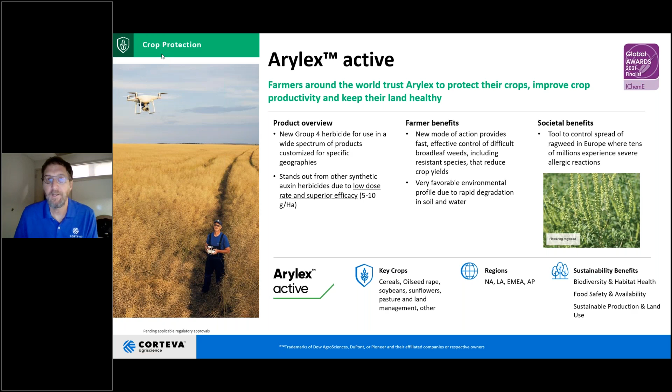An important societal benefit that Arylex is poised to help provide is in the control of invasive ragweed in Europe in particular. Ragweed is a weed that is indigenous to North America but has spread to Europe, and is also projected to expand its footprint across Europe due to climate change. Tens of millions of people in Europe currently experience severe allergic reactions to ragweed, and the ability to control this weed, which causes a public health issue, is an important societal benefit of Arylex.

The manufacturing process to develop Arylex involves a key step which utilizes a precious metal palladium catalyst to form the bond between the two rings of Arylex. In developing the manufacturing process, we had to perform this chemistry using this expensive palladium catalyst, and efficient use of palladium was key to the commercial value of this product and its ability to be used by farmers.

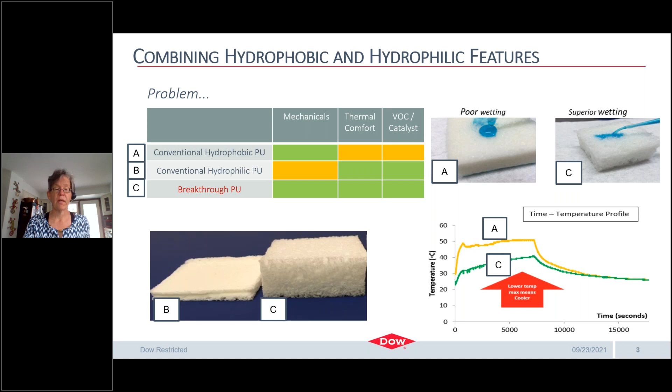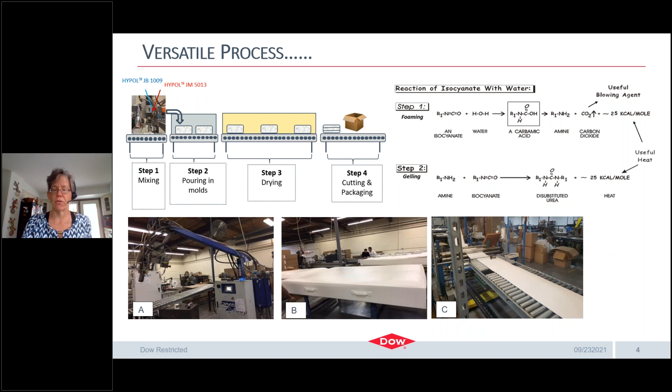I have a short video I'd like to show. We'll see if it works. And if it doesn't, just let me know.

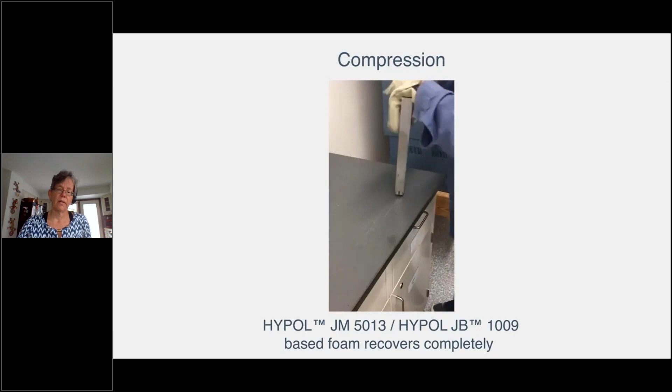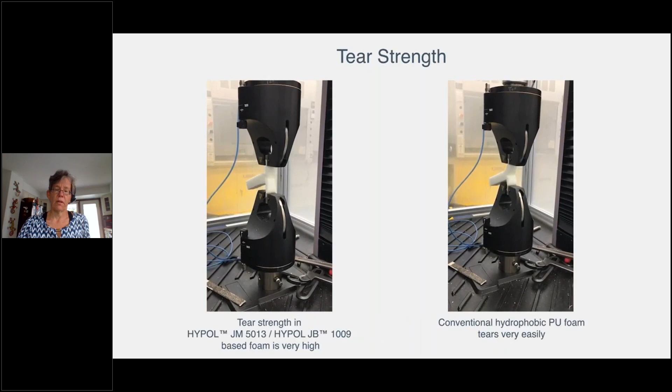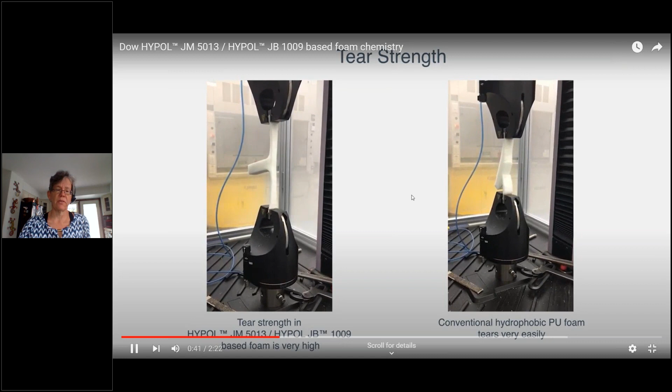Here is a comparison of tear strength. This is a conventional material here - you're going to see it rip pretty quickly - whereas our new material continues to have elasticity there.

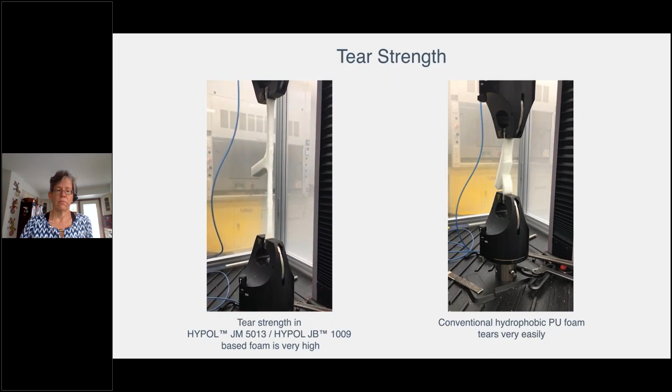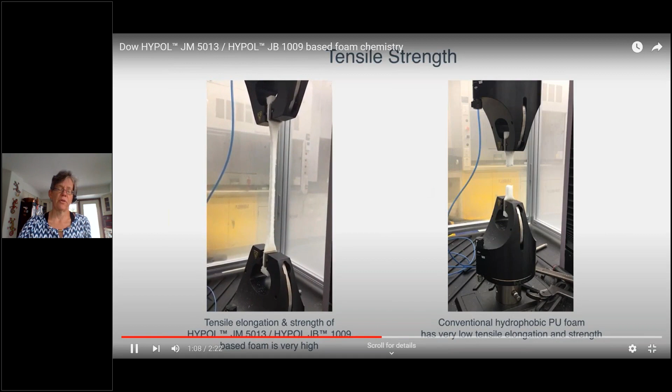Another demonstration comparison here of the typical hydrophobic foam - you see how it almost breaks immediately. The earlier one was a tear test; this is more of a whole structure test. And this is again an example of the wetting here, which is important for these applications, both for breathability and for comfort.

You saw this photo really on the earlier slide.

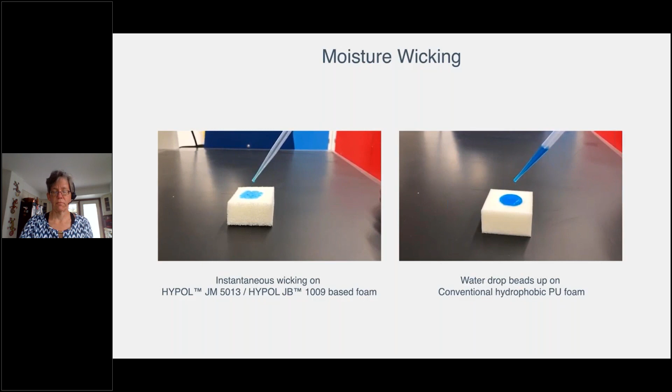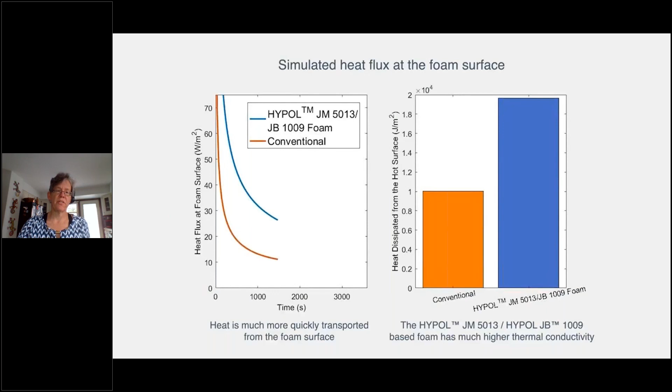And in addition, heat flux is important, and you see the benefits here - higher heat flux. So with that, I'd really like to thank you for the opportunity to present.

Wish I could say more about the chemistry, but that's the challenge with industrial projects.

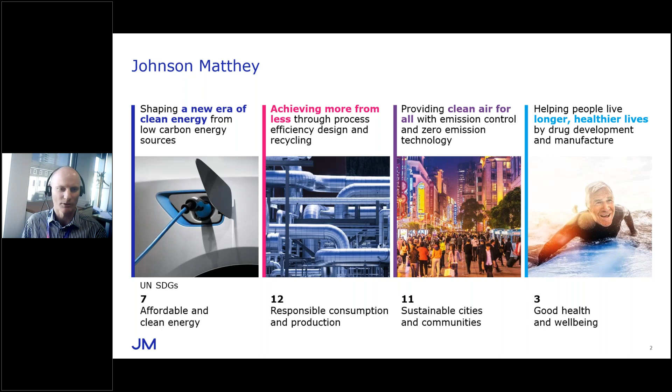Hexane diol is used as a chemical intermediate monomer in polyurethanes, acrylates, and polyester resins. It can impart improved properties compared to other diols, such as greater flexibility and greater hydrolytic stability. The feedstock is adipic acid, which is readily available as it's used to make nylon 6,6.

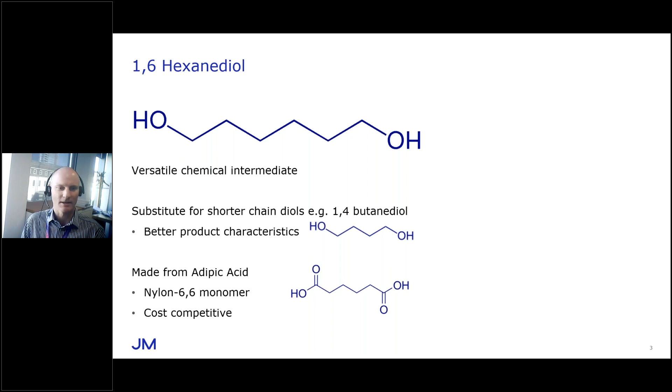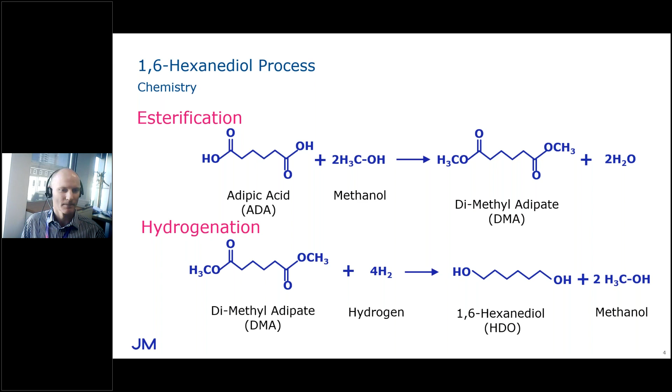This just shows the overall process. The methanol can be used to dissolve the adipic acid, as well as performing the esterification reaction. The ester is then hydrogenated with hydrogen to hexane diol and methanol, which is separated by distillation, along with the other byproducts to achieve high purity product. The methanol is recycled back to the front end. A small methanol makeup is required to replace a small amount of methanol lost to byproducts.

Within JM, we have all the skills and capabilities needed to develop a new chemical process, all the way through from concept through to successful operation. This includes all the steps shown in the blue boxes, from ensuring there's a market for the process, designing manufacturing catalysts, designing, building and operating process mini plants, engineering scale up and design, and licensing capability. Underpinning this are the internal procedures to ensure the work is focused and managed with appropriate checks and reviews.

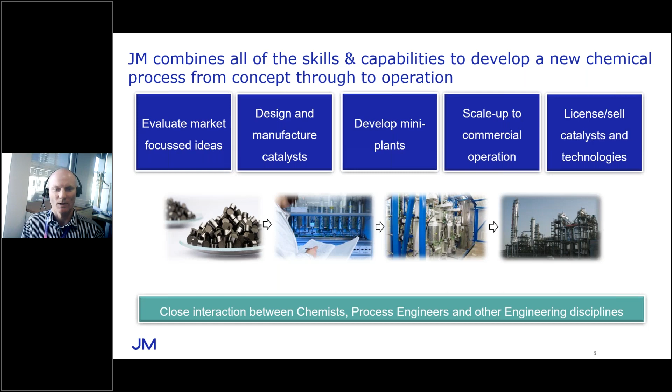The hexane diol process development was a recent example where we were able to take a process from concept to successful license and start up in a very short time. JM had already licensed a dozen plants using our maleic anhydride to butane diol process, and we were able to adapt reactor technology that was used there, such as our proprietary esterification reactor concept.

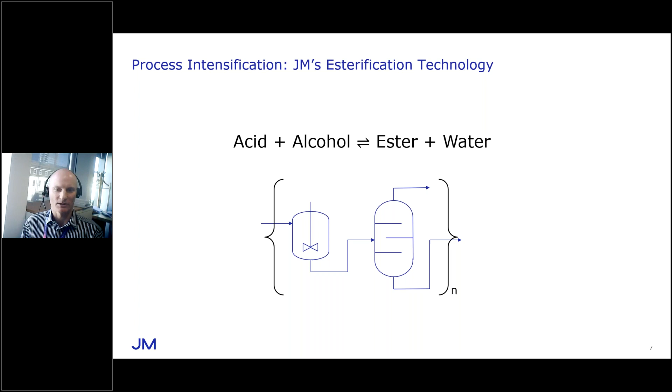The esterification reaction is an equilibrium limited reaction, so for high conversions, it's necessary to carry out a series of reactions and separations over a dozen times to achieve the high conversions required. JM's reactive distillation column combines these via innovative catalyst separation and reactor technology, reducing footprint and enabling one column to replace multiple unit operations - a good example of process intensification.

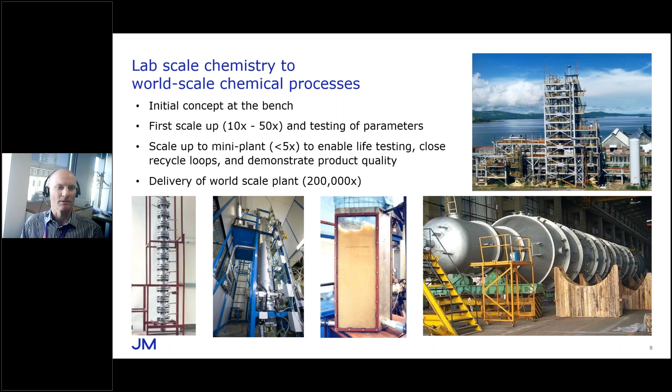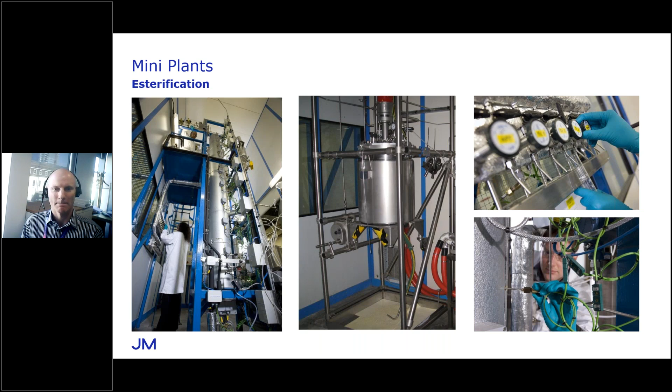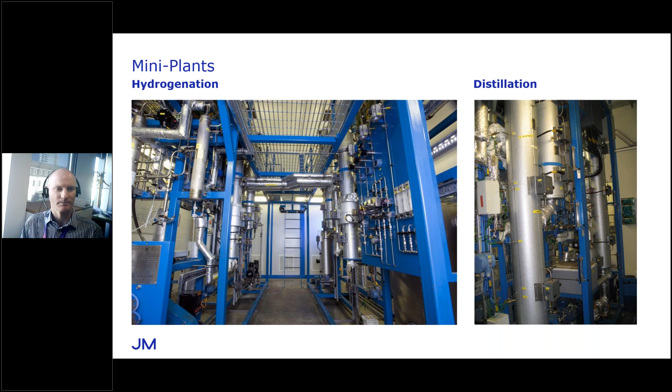JM doesn't own or operate chemical plants, but has a licensing model instead. The technology transfer is performed via a basic engineering package that contains all the information for an EPC contractor to complete the design of the plant. Engineering services include reviewing detailed engineering documents, supporting HAZOPs and performing construction reviews.

JM supplies all the catalyst and some proprietary reactor internals. We then provide training and perform pre-commissioning checks, and provide commissioning assistance to help successfully start up the plants.

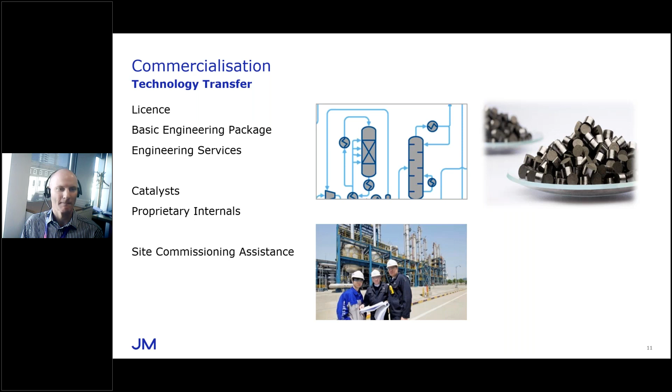We've sold 2 licenses already for our hexanediol process. The first license was sold to Chongqing Yuanli for a 30,000 tonne a year plant in China, which was successfully started up in April 2019. The second license was sold to Henan Shenma for the same capacity, also in China. We've just finished the basic engineering package for the second plant.

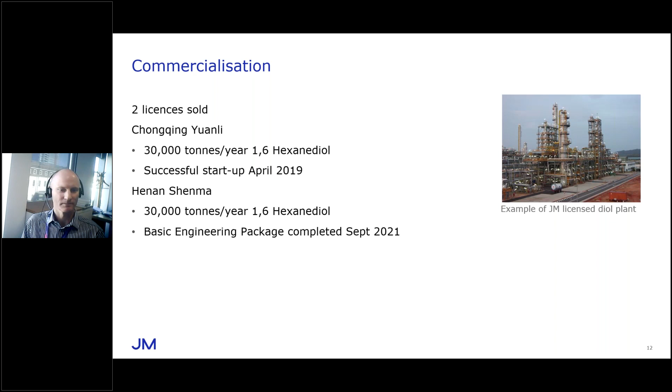Now, hexanediol is just one of a number of technologies which JM licenses, using a number of core technologies. Commercializing new process technology is hard, and there are many risks. Our extensive experience in developing and delivering licensed technologies was key to successfully turning the concept of the hexanediol process into reality, using our highly skilled chemists and engineers. And I'm proud to represent them all at the IChemE Awards. So thanks for your attention.

Thank you, Harry. Thank you, Harry. Okay, thank you very much.

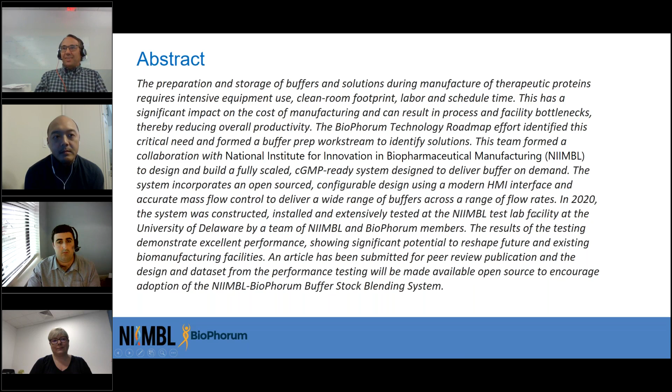And this is a bit unique because it's a collaboration in the industry where we've come together and recognized a problem that we all face, and no one has the ability to take it on their own. So by working together, we've been able to develop a solution that can solve this issue for the industry. So I'm not going to read through the whole abstract, I'll leave that for the future, but let's go to the next slide, and I'll get into the problem and how we solved it. So in therapeutic protein manufacturing, we use a lot of buffer, and a lot of our energy and time and effort goes into making buffer.

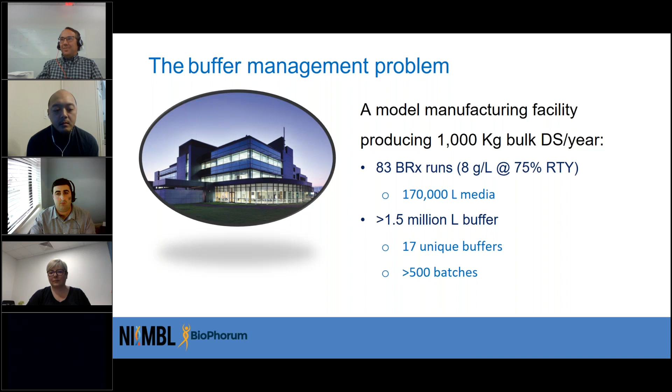So we're talking about producing proteins in biologic manufacturing made in cell culture. It's a very highly controlled process, it's all done in clean rooms. So to produce a ton of bulk drug substance in a year, it takes 83 bioreactor runs, and that requires 170,000 liters of media, and then about 10 times as much buffer to process that material and purify it.

So the buffers are used in chromatography processes and other purification steps. Typically, a process would take about 17 unique buffers, and we'd need to make over 500 batches of buffer a year to support that. So it's a very intensive process. It takes a lot of footprint, and a lot of it's in clean room space, which is expensive to maintain. It results in high material consumption, a large impact on the environment, takes a lot of labor, and the logistics of managing that can be quite a challenge.

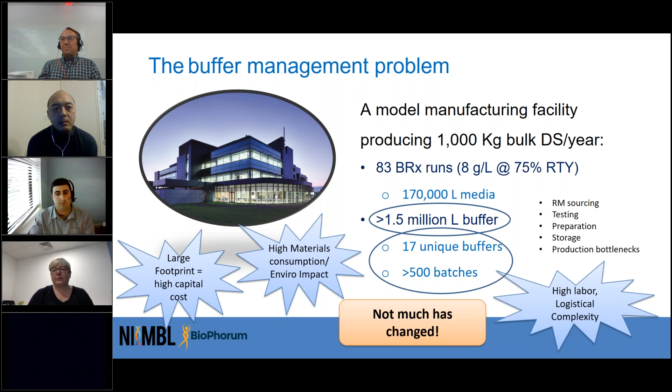Everything from raw materials, testing, preparation, and in the GMP world, these can add a lot of extra burden on the manufacturing, so that we have to prove everything and track it very closely. So ultimately, it ends up with bottlenecks in production and limits our capacity in the facility. And the point is, not much has changed in the industry in the last 20, 30 years. And that really gets back to the point that no one on their own had the ability to solve this issue. So in discussions in the BioPhorum, we've identified the issue and come up with some unique solutions.

And that really highlights how important this was. So BioPhorum had these ideas in the technology roadmap, and kind of laid out the blueprint for what to do. And then to take action on it, there was a partnership in the US with the National Institute for Innovation in Manufacturing of Biologics, where we came up with a proposal to develop a project to fund and support actually building this equipment in the consortium, involving members from both BioPhorum and NIIMBL from a number of different companies.

And through that project, we designed, built, and tested this equipment. So we'll go into some of the details about that, and I'll pass it off to Don Chao here, and he can talk more about how that came about.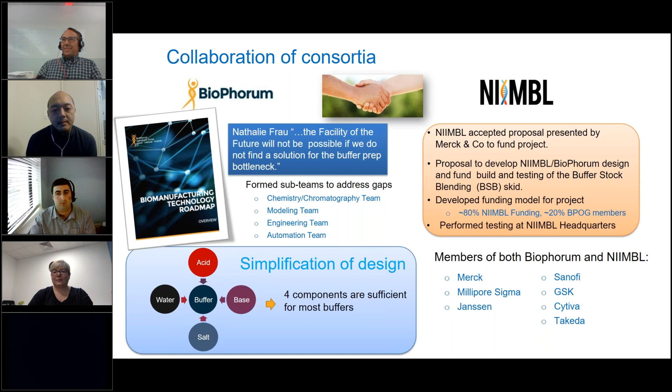Yeah, thanks Paul. So as Paul mentioned, there was an industry challenge, and we were trying to tackle that. So why were we trying to do this? We were trying to increase the adoption of this technology within the industry. So the democratization of the technology is a big driver for us.

Additionally, we wanted to make sure that we try to reduce cost for the industry. Again, as Paul mentioned, the making of buffers was very labor intensive and very costly in terms of labor and material, and really the footprint required in a biopharmaceutical plant.

Because no one could do this alone, the team came together, and we wanted to demonstrate that proof of concept by really actually building this skid and making it available for everyone to take on and adopt it within their plant.

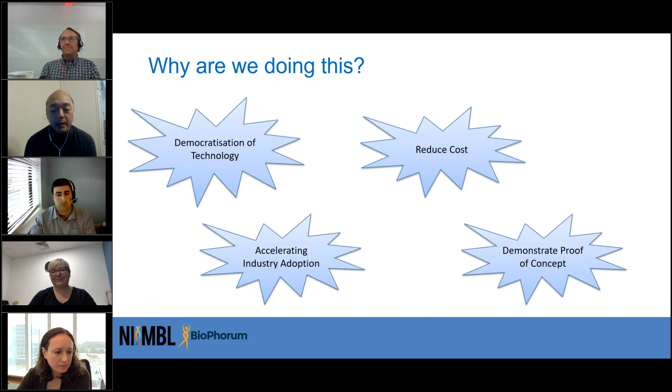Let's move on to the next slide. So this is a picture of the skid that was fully built and developed. It was built with a full GMP design in mind, from a hygienic clean room design made to fit in a clean room environment, as well as a fully commercial automation platform made to fit in a GMP environment to meet FDA Part 11 compliance and other good automated manufacturing practices.

It was based on mass flow recipe-based control, in comparison to pH feedback control. It was made to be flexible, so you can connect it to bags, to tanks, or directly to a chromatography or downstream chromatography skid. It's made with modern automation controls, and the design and documentation are open source for development of future skids. When adopted by other customers, it can be easily adapted and configured to meet the specific customer and user requirements and needs.

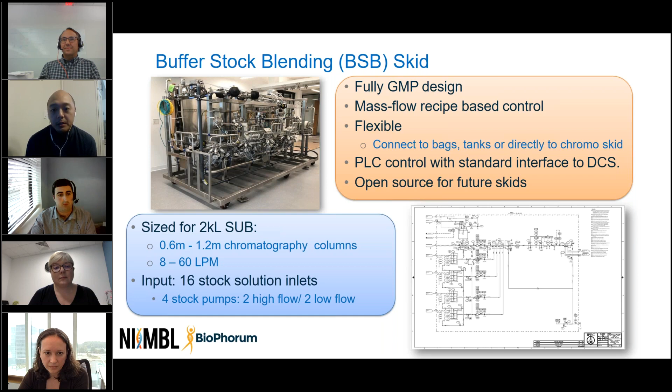It was modeled off of a monoclonal antibody process, sized for a 2,000 liter single-use bioreactor with 16 stock solution inlets. Next slide.

Summary of our achievements: the collaboration across NIIMBL, BioPhorum, and across the multiple companies involved was absolutely amazing. It's something that I'm very proud of. This collaboration over 2 to 3 years across 4 different time zones, with many meetings in between. So it was a huge effort across all individuals and organizations.

Over that time, there have been several white papers published, and one more white paper addendum to be published in the future with a full data set available. As said, the skid's been fully built. It's also been fully tested with a factory acceptance test at the factory site, with some more testing done at the University of Delaware, the NIIMBL building.

Some of that testing was realization testing and demonstration testing, all just to provide documentation, a data set available, so that adoption of this could be easier. People understand that this is something that's true. It meets what we designed it to do, right? And it's made to make buffers quickly and more agile than in the past.

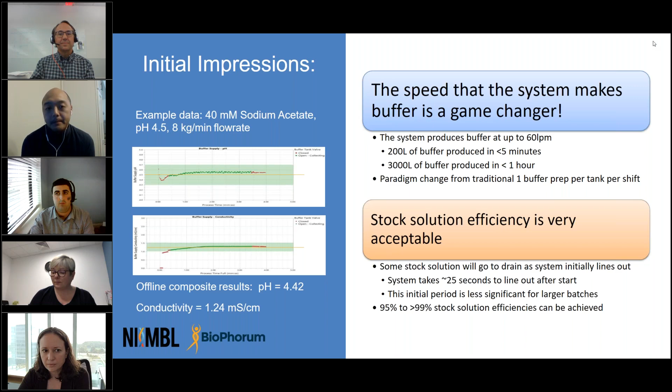Thanks very much. I suppose the use of the buffer stock blending system will have a significant impact on facility design and operation. As Dylan mentioned, one of the key advantages is you reduce the number of preparations required significantly, so rather than producing, say, 20 buffers a batch, you're going down to a much smaller number of common single component stock solutions.

So you reduce the amount of preparations you need in half, or even more so. That in itself has a massive impact on the labour for buffer manufacture. Buffer is one of the most labour intensive areas of biopharmaceutical manufacture, and this addresses one of the key areas.

In addition, because of the single component nature, you can reduce the volume of liquid to be stored and handled significantly. In a traditional buffer prep, you prepare in a tank or bag, transfer into a holding bag or tank, and then transfer it to, say, your chromatography process. In this case, you have the option of going direct to your chromatography system and eliminating the need for buffer hold completely.

Given the amount by which you reduce the volume of buffer to be handled, it allows much greater single-use utilization at a large scale, which in itself increases flexibility and reduces capital costs. For every scale of manufacture we've looked at, whether it's a 2,000 litre single-use scale or a large stainless steel facility, the overall total cost of buffer is reduced considerably using buffer stock blending.

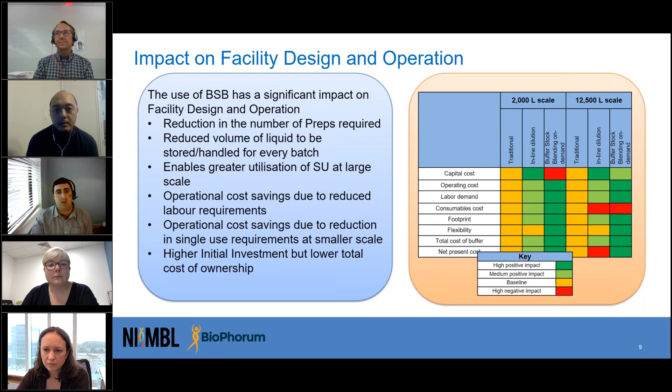In conclusion, traditional buffer prep occupies a significant amount of labour, capital, footprint and time. As Paul mentioned at the start, BioPhorum identified the potential for addressing this as part of the technology roadmap, and identified it as a key industry challenge. As a group, we came together and came up with some ideas of how to resolve the issue.

NIIMBL funded the design, build and testing of the BSB skid, and the outcome really shows that the skid works extremely well. We're able to produce a very wide range of buffers in real time. One of the key features of this project, which makes it unique, is the design and the data set from the testing is going to be released open source.

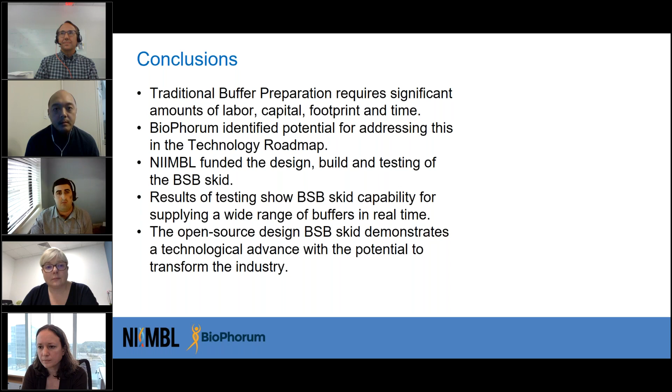So it's really a case of the industry coming together to solve a common problem, and we're putting that design out and making it publicly available so this can be implemented and accelerate the impact on the industry.

I suppose we mentioned the collaboration across the industry, and there are too many companies and names to go through, but on the screen now gives you an idea of the number of companies and individuals who've been involved in the project. It really is a case of the whole industry coming together to solve this problem. Obviously open to any questions if there are any.

Hello, can you hear me? Yes, we can.

Yes, good day, ladies and gentlemen. Please allow me to start by introducing myself. My name is Hesham Alzaher, working with Saudi Aramco as an operations advisor. Today, it is my great pleasure to share with you one of Saudi Aramco's initiatives toward achieving zero flaring at our facilities.

Here is the outline of my presentation. I will start by shedding some light on gas flaring. Then I will move to the current conventional technique for oil well reviving and boosting, followed by the invented approach which I'm presenting today. After that, I will conclude my presentation by the benefits we are gaining from this invented approach and its advantages.

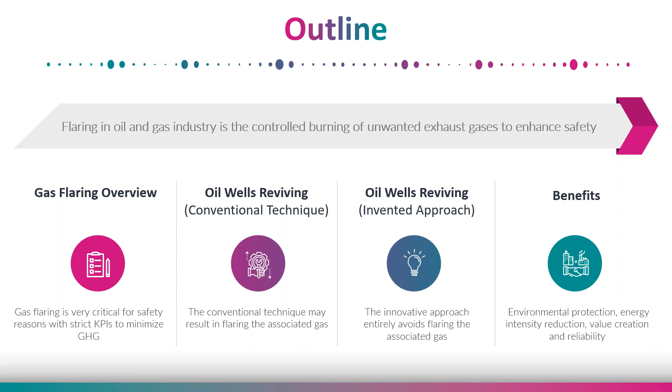Before we go any further, I would like to introduce the inputs and outputs of our gas oil separation plants, GOSP. The GOSP receives crude oil from multiple oil wells scattered in the field. Inside the GOSP, the crude oil is processed and separated into three main outputs: processed oil, compressed gas, and produced water. To maintain the safety of our personnel and equipment, we have gas flares to safely burn any excessive gases.

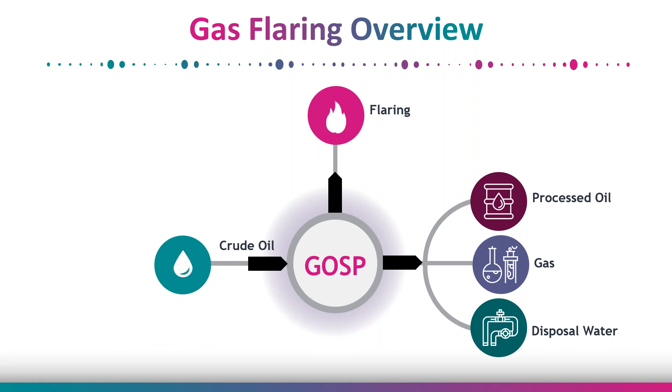So, flaring is the controlled burning of unwanted exhaust gases to enhance safety. Although gas flaring is important for safety reasons, it has many drawbacks, including negative impact on the environment, primarily due to incomplete combustion of the gas and the waste of potentially useful resources.

The crude oil that gas oil separation plants receive comes from several wells with different characteristics. Over the years, some of these wells may deplete and require boosting and reviving. This exercise, reviving and boosting wells, is common in the oil and gas industry, and it results in unavoidable flaring.

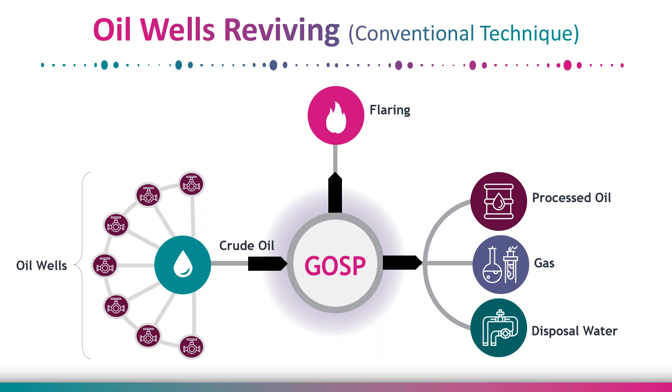So we have a conventional practice that we commonly use for this vital activity of reviving and boosting wells. We also use this conventional practice for well testing and flow line depressurizing.

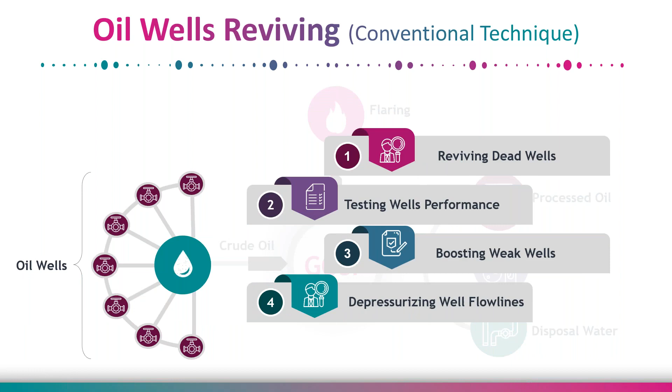Ladies and gentlemen, as you can see in this figure, in the conventional practice, we utilize high pressure test trap, HPTT, which is a pressure vessel inside the GOSP. To boost and revive dead wells, the pressure in the HPTT is reduced until a sufficient differential pressure between the reservoir and the vessel is achieved. This allows natural flow of crude oil to the GOSP. However, in some cases, the HPTT low pressure will not allow processing the gas, which leads to flaring.

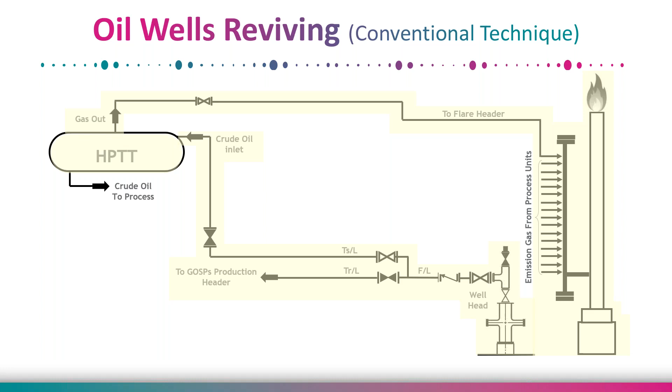Therefore, we realized that an innovative approach that would eliminate gas flaring in all cases would be very valuable to protect the environment and increase the revenue. So, ladies and gentlemen, we reached my favorite part of this presentation, which is the invented technique.

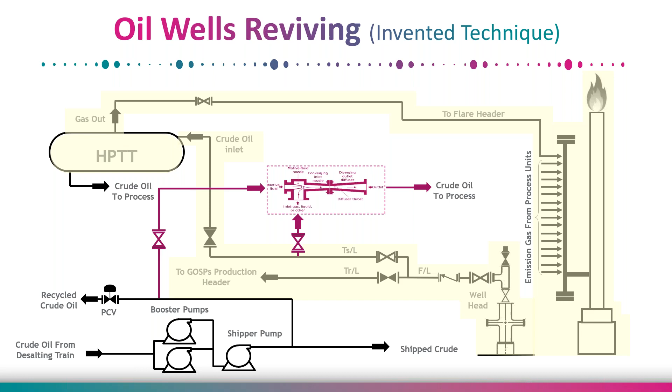Basically, the idea is to install a multi-phase ejector that capitalizes on the existing infrastructure and available resources at the GOSP by utilizing the high pressure of the shipped crude as a motive source. This motive source is used to stimulate dead and weak wells to flow. As the low pressure source from dead and weak wells meets the high pressure source from the shipped crude, they mix inside the ejector. The mixture, which has an intermediate pressure, will be diverted for further processing without any flaring.

So, the working principle of ejectors is very simple. First, a high pressure source is needed. Once the high pressure source passes through the ejector, its pressure will significantly drop, resulting in a sonic velocity at the neck and supersonic velocity at the exit. This will create a low pressure area that can stimulate the flow from low pressure wells.

After that, this high velocity flow, along with the oil from the low pressure well, will pass through the other part of the ejector, which is another converging diverging nozzle. In that part the velocity will drop and the pressure increase to an intermediate pressure sufficient to divert the mixture for further processing.

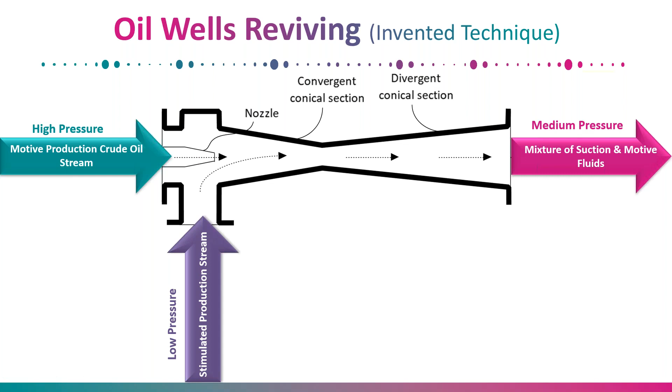Moving forward, the invented technique has the following benefits and advantages over the conventional practice. First and foremost, it eliminates the reviving associated flaring. Furthermore, it increases production by boosting low pressure wells. In addition, as opposed to the conventional technique which requires pumping, the invented approach is more energy efficient because it only uses an ejector, and ejectors are static equipment that utilize no energy. Last but not least, it is maintenance free, as ejectors have no instrumentation or rotating parts.

By this, we are able to participate in embracing a circular carbon economy by reducing carbon footprint while increasing energy supply to the world in a safe and environmentally friendly manner.

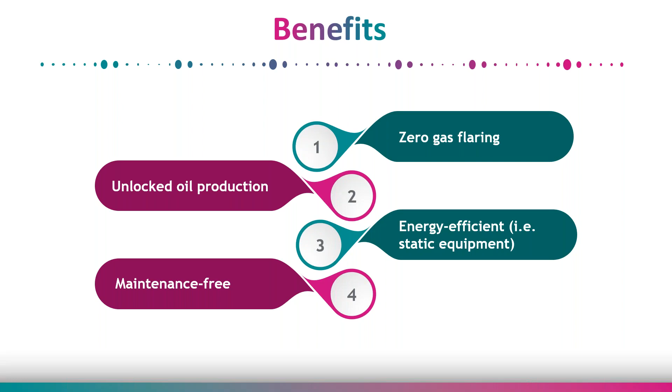This brings me to the end of my presentation, and I will be glad to answer any questions you may have. Thank you for listening.